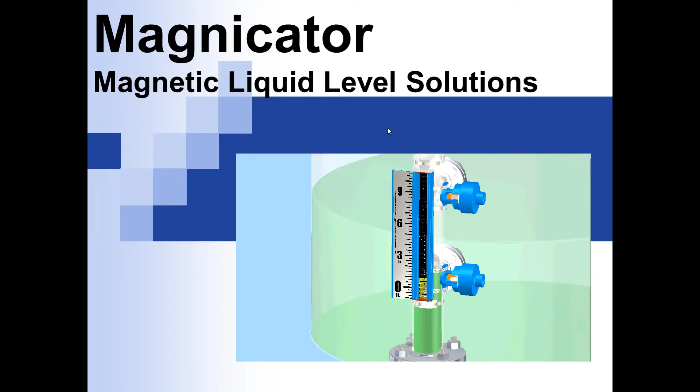As it moves up and down, the magnets in that float are coupled to the magnets in the flags. You'll see those flags turn over, black to yellow, showing your level going up, and yellow to black showing your level going back down. There's also, coupled on the side, some snap action switches that are activated by the magnets. You can also have a transmitter on there. So again, this is just a 3D representation. We're going to discuss all those different points in detail throughout the course of the presentation.

So you'd have to manually reset this—take a flag, reset all these flags to where you know the level to be—or simply wait for the float to cycle down and back up. Of course, if you have switches on the side, this is problematic with the weak magnetic coupling, as well as if you have transmitters on the side, since they rely on that magnetic field from the float. And this, like I said, is the number one problem that I see when I travel out into the field.

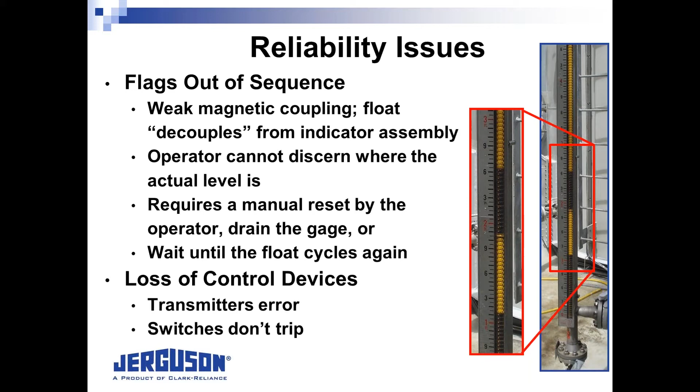So the solution begins with a better magnetic field coming from the float. The Jerguson design uses a unique arrangement.

We take 2 Alnico 8 ring magnets. Alnico 8 is a permanent man-made magnet. Alnico stands for aluminum, nickel, and cobalt. The 8 rating is a combination of factors, it's not simply a strength rating, but you can kind of think of it that way. It's a permanent magnet, rated to 1,000 degrees Fahrenheit. We take 2 of these ring magnets.

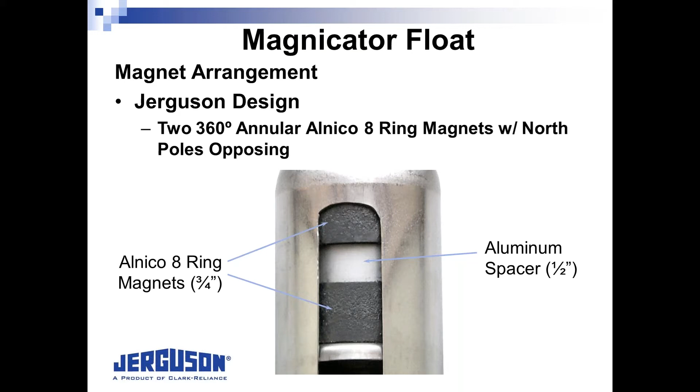When you take those 2 north fields and you push them together—hopefully everybody here has kind of played with magnets at some point in their life—you get that repulsion, that repelling you feel from the magnetic fields, and that repulsion is magnetic flux. The principle of magnetism is just like electricity goes from positive to negative; magnetic field flux goes from north to south. So when I take those 2 north poles and push them together, another principle is those flux lines can't cross. So when I push them together, that repulsion you feel is those flux lines pushing back, because I'm trying to force them together and they're saying, no, I can't.

And what that creates is, we're taking that field and pushing it out far away from the center line of the float. Again, it's a hollow magnet, so here's your center line and here's where the bodies are. So when I'm forcing that magnetic field out far away from the center of that float, I create a very strong north magnetic field out here, out where the flags are. And that's where you want to have your magnetic field, not only strength, but focus.

Circling back, I mentioned Alnico 8. There are other grades of Alnico, but the number that is most important here—there's a couple things. One is your max temperature. Again, our entire gauge is rated to 1,000 degrees Fahrenheit as a standard. So you want to know that your float magnets can withstand your process temperature.

Alnico 8, the reason we use it, is it has a very high magnetic coercivity number. Other manufacturers use Alnico 5. The problem with the lower grade magnet is, under the presence of both temperature and magnetic field, that Alnico 5 magnet can lose its magnetic field. So there's actually some brands out there where a customer will say, well, my float decoupled, there's something wrong with my float. And they'll say, well, you just send it back in, we'll recharge it. And they put it into a machine and it puts a new magnetic field back into those magnets and sends it back. So on our design, because of that high magnetic coercivity, you don't have to worry about that.

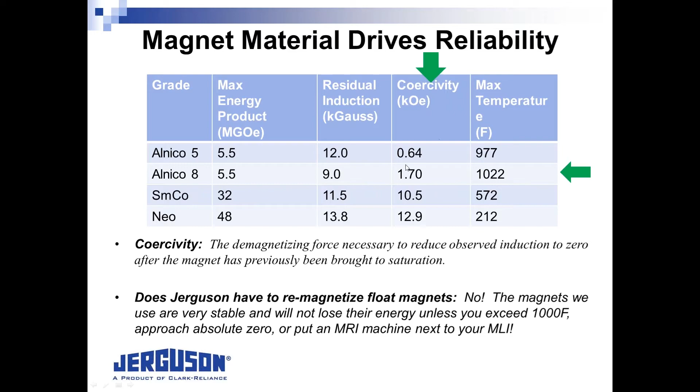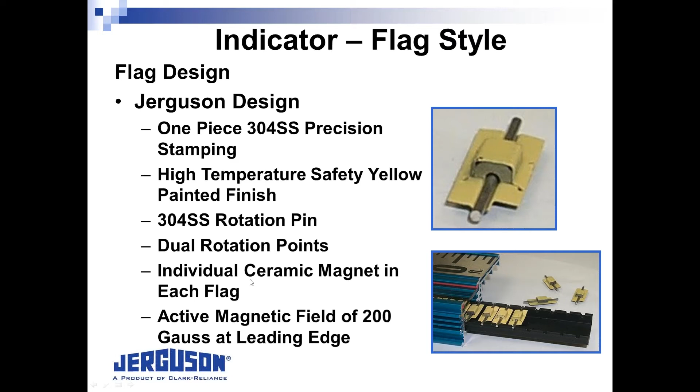I mentioned that magnetic field strength is important, but the principle about magnetic fields is it's not just the strength, it's also the direction. You want to have as much as possible a tangential magnetic field here, where your field is, because that's what's going to pull that. You want to be pulling those flags this way, you want to turn them.

So you need to have, when we talked about at the very beginning, the different pieces of a magnetic indicator - you have your chamber, your indicator, your float. We've talked about the design of the magnetic coupling between the indicator and the float, but just as important is having a reliable chamber design.

Our standard chamber is 2.5 inch Schedule 40 pipe, shown here. We do not use Schedule 10. There are some manufacturers who offer Schedule 10 as standard, and I've been into many refineries that don't allow Schedule 10 in the plant, but during the quoting process they didn't pay attention and may not have specified Schedule 40.

A vendor sends in a quote using their standard Schedule 10, the purchaser misses it, and they buy it and install it. Only after they've written the check and gotten the product do they find out it's Schedule 10, and now they have to go in and fix that problem. So something to pay attention to - it does happen. Even if your standards call for it, you have to make sure it's complied with when you place that purchase order.

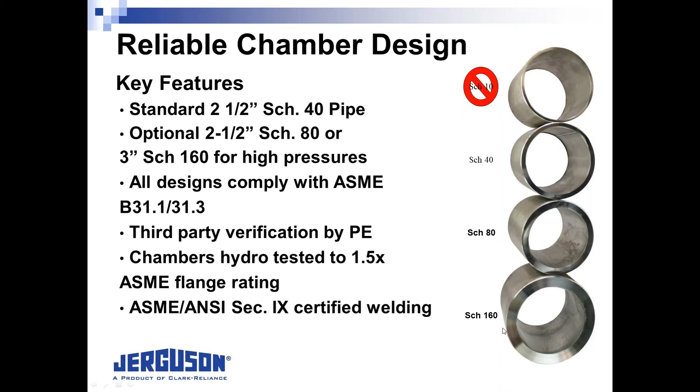So speaking about nozzle designs, these all comply with ASME design, and all the engineering has been third-party verified. For 150 pound and 300 pound class gauges, our standard nozzle connection would be a slip-on type flange over a pipe nipple. The pipe nipple is saddle weld prepped, and it's a full penetration weld to the chamber. It is a full penetration weld, but it's not an X-rayable weld. That's sometimes a point of confusion. This meets ASME for 150 and 300 class magnetic level gauges.

When you get above 300 pound class, 600 and above, ASME requires a self-reinforced fitting, so we have to go to an O-let or a weld O-let. That weld O-let is a full penetration weld to the chamber. In this case, this is now a socket weld type. You'll notice this opening is a little different because you're not doing the slip-on style. You have a socket weld to the nipple, to the O-let, to the chamber, and that's your branch connection.

Now, in both of these scenarios, you're limited on the size of the branch connection you can safely put onto the pipe. So our standard for a 2.5 inch, unless you specify otherwise, even for 150 and 300, is going to be a 1 inch nipple. And that's true for the O-let as well, so we use a 1 inch nipple. This is a reduced size, so even if you have a 2 inch flange here, it's still going to be reduced down to 1 inch.

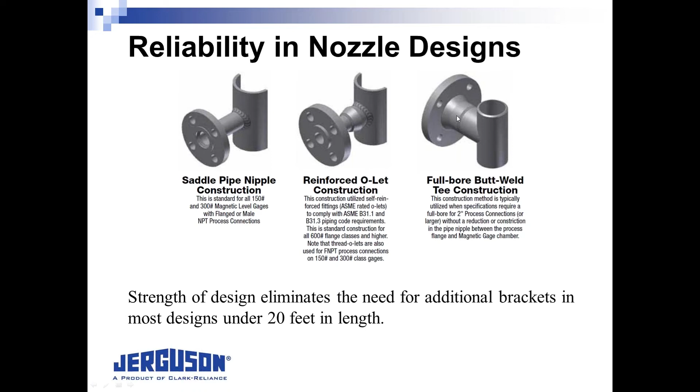So that closes off the chamber section. We talked about indicators, but one of the biggest benefits of going to a magnetic level indicator over a glass gauge is, on top of what Mike touched on at the beginning, the old style tubular gauges got pretty dirty. They came up with brushes, so you go in and brush them out. Obviously operators don't love doing that, it takes time, you have to shut it down, isolate it, brush it out. Magnetic level gauges, of course, you don't have to worry about that contamination. It doesn't mean they're maintenance free, especially in dirty service. You still may have to flush a magnetic level gauge from time to time if you have buildup, but you typically get a longer time between maintenance where you'd have to flush it out.

But again, one of the other benefits is because you have that magnetic float inside, I can now put devices on the outside that use that magnetic float for function. Whereas a glass gauge, obviously, it's a window into the process, but I can't put a switch or a transmitter or anything that works off of that window. So the SAS16 is a snap action switch, it simply clamps onto the side of the gauge.

It's rated to 750 process temperature. There's no cams, springs, no movable parts. You can actually see it best in that first slide, but there's a primary magnet right at the chamber, and as that float moves by, the outward tip of that magnet is attracted to the float magnet. So as the float moves up, it moves up, and as it moves down, it moves down. Inside, on the opposite side of the back of that primary magnet, there's another magnet that is repulsed by that same side. So I have a north field for my float, the south field's here, I have another north on the inside, and then I have a magnet with a north. As this inside one moves up and down on the pivot, the switch is made by that action of that repulsion force.

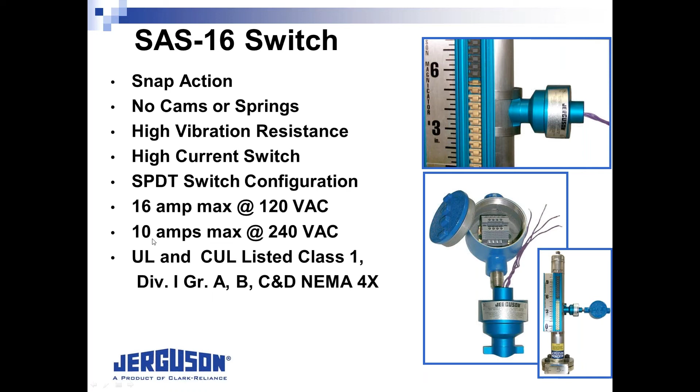UL for North America, but we also have an ATEX unit if you were selling units that were going to Europe.

So coming out this year, we've had on the market the MT2 4200 for a number of years. We're still officially selling the 4200, but we also have available the MT2 4300, our next generation of transmitter. We're still going through some of the final steps in the production process, but we've been putting it into the market for the past probably about 4 months.

One of the big step ups is, this is a 4-20 milliamp device, continuous output. The old 4200 was HART 5, the new one is HART 7, so it brings it up to current standards. On top of just updating the display, it's got a nice bigger display. It has a user interface without opening the cover. The old one had a 3-button interface.

Some of the big changes are the signal-to-noise ratio, substantially higher than the 4200, up to 5 times as high. So you don't have to worry about noise being as much of a problem and causing false trips.

There's an adjustable rate of change filter, so you can tell the transmitter, if it's mapping along really nice at 24 inches and all of a sudden the transmitter thinks it's at 60 inches because of noise, the transmitter is smart enough to say, well, it's not possible, I can't go from 24 to 60. Depending on the setting, it'll ignore that 60-inch reading until it settles back at 24 inches when the noise settles down.

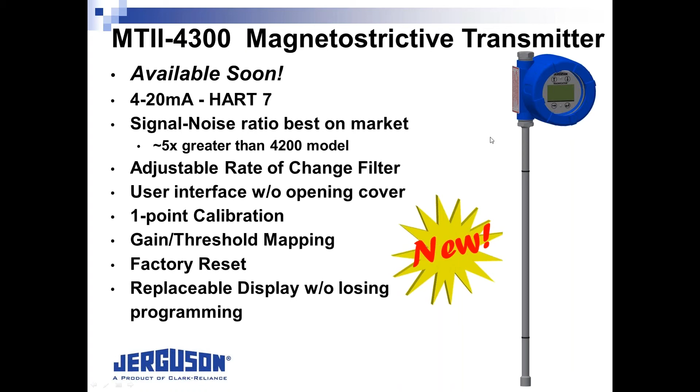You can replace the display without losing programming. So if the display, over time, grays out or becomes damaged for whatever reason, you can replace that and your programming stays integral to the boards. So we're pretty excited about that.

So that's the product part of the presentation. I do want to talk about some applications, some challenging applications.

One is flashing or boiling service. There's a video we'll show you here in a minute, but with the emergence of fracking and all the gas work that's been done over the past decade, we've seen a much greater demand for level gauges that can handle cryogenic applications. One of the biggest markets out there is gas fractionation. Especially right here in Ohio, they're bringing the gas out of the ground and splitting it into different consumables: ethane, propane, methane, etc. Part of that fractionation process involves cold boxes that make those level gauges really cold.

If I have a fluid, we'll use propane as an example, that I have to keep at, let's say, minus 40 F, in my big vessel it's contained at -40 F, well insulated and chilled. I have some piping coming off the side going to this level gauge. I have a much smaller volume of fluid, and even though it's insulated, I have a much higher surface area, so I'll have greater heat loss into that chamber. What will happen is you'll slowly raise the temperature of this fluid to the point where you start to get some boiling or flashing.

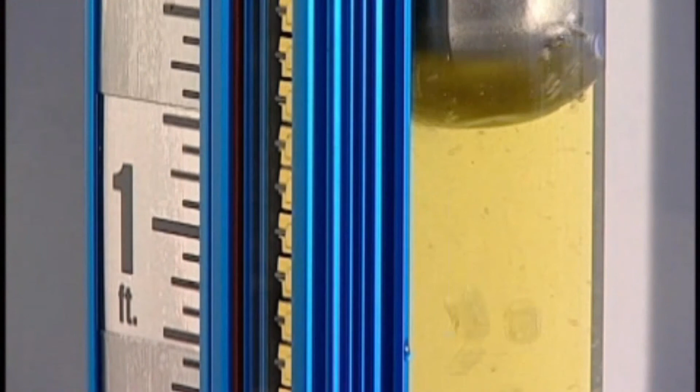If the liquid in your magnetic level gauge boils or flashes, you can forget about getting reliable level measurements for indicators, transmitters, or switches. How can this happen? It's a hot summer day. The liquid in your storage vessel is being maintained at a controlled cold temperature. However, the small amount of liquid within your magnetic liquid level gauge has warmed up to near or above its critical boiling point. Entrained gases from the boiling rise and collect under the float, reducing its buoyancy. This boiling fluid can sink not only your float, but any hope of getting an accurate level reading.

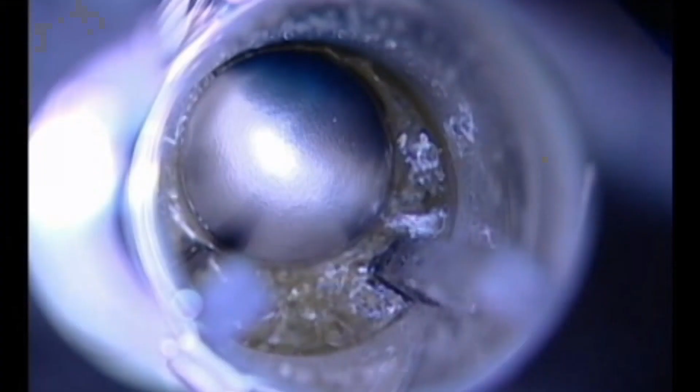The new Jerguson Magnicator Flash-Proof Gauge features a unique chamber design to eliminate problems from boiling liquids and flashing vapors. By employing an oversized 3-inch Schedule 40 chamber with internal guide rods, entrained gases easily escape past the float.

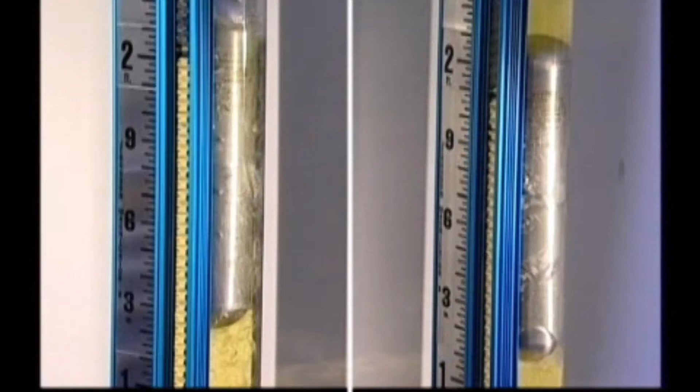An accurate float level and indicator reading is maintained, as the guide rods hold the float to one side of the chamber to ensure an optimized magnetic field in close proximity to the indicator, transmitter, or switches.

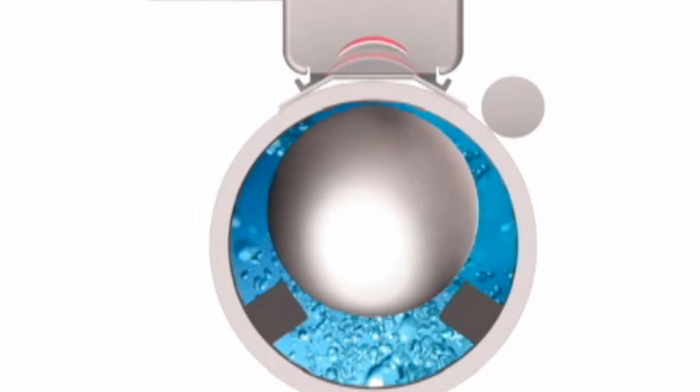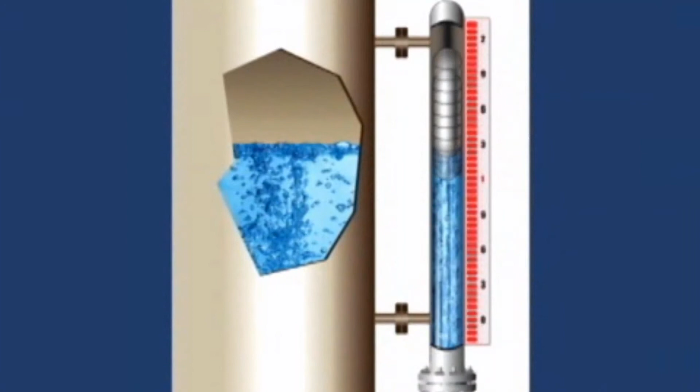The Jerguson flash-proof design also eliminates crushed floats due to flashing vapors, which can happen when the float rapidly accelerates into the top of the chamber due to depressurization.

Because your plant's operation requires reliable level measurement for indicators, transmitters, or switches, we'll scroll through some applications of fluids. Generally the rule of thumb is you can use 0 Celsius, 32 Fahrenheit, whatever number you want.

That should be the point where alarm bells start going off. That is to say, if you have a process that operates right around that 32 Fahrenheit -- obviously if it's winter, we're based out of Cleveland here, it was about 20 degrees driving in this morning, you're not going to have any heat loss, so you don't really have to worry about flashing in the middle of winter. But in July, when it's hovering in the mid-90s and you get some direct sunlight on that gauge...

...process that's operating around 32 degrees Fahrenheit -- if it's got to maintain 32 to stay in a fluid state, you're certainly going to get some heat loss there into the chamber, and you'll definitely get some flashing, and that's where the issues come up. It was as simple as an application I had in Pennsylvania where they had a large bullet tank like this. It was a cryogenic tank.

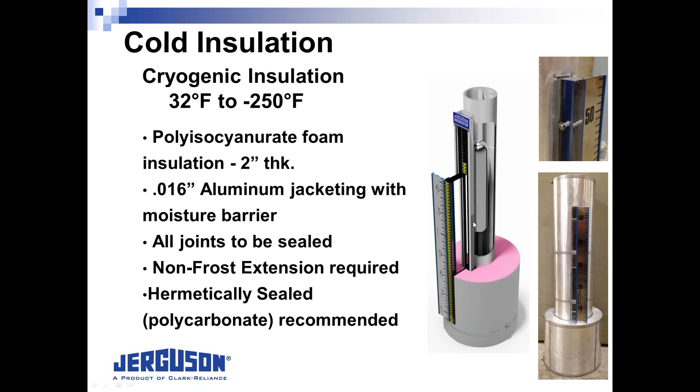If they're buying this to install it, I typically recommend letting us do the cold insulation. From a cost standpoint, it's going to be very similar, maybe even less than what they'd pay to do it in the field. And ours is done better -- we do a better job sealing it up than a lot of what I've seen in the field. We run into issues where they don't do a great job sealing it, moisture gets in, they start to get ice buildup, and that ice buildup causes issues -- if you had a transmitter under there, it puts pressure on that transmitter or what have you. So something to keep in mind.

So that's how we came up with that design, the oversized 3-inch Schedule 40 chamber with the guide rods. I'll talk about the construction now. It's 3-inch Schedule 40, and we use guide rods at specific locations, a square guide rod.

This creates a similar sized opening to what the 2.5-inch Schedule 40 was for the float, but then creates a massive bypass zone for flashing vapors to move around the float, like you saw in that video. This square guide rod is welded at the ends of the chamber, and it's back welded to the chamber, so we drill out the chamber and back weld it every 3 feet or less, so you never have to worry about those guide rods coming loose, bending, or flexing, causing the float to not be able to move by. So we came up with this design for flashing applications, for cryogenic applications.

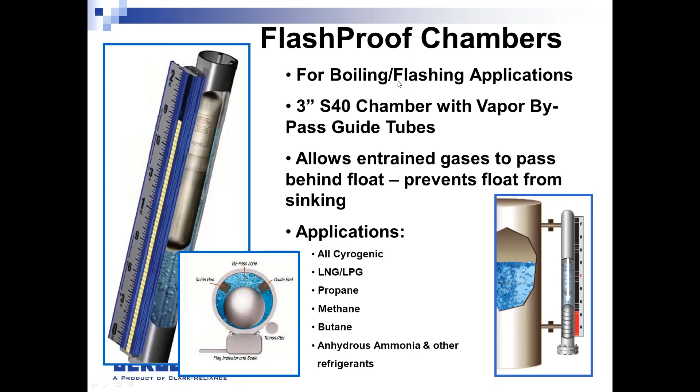But something we discovered along the way was it also worked really well in dirty service. The reason being is, I have this oversized chamber to allow flashing vapors to move by. Well, what about if I have particles?

So if I have a dirty service, the one I always like to use is the reduced crude drum. You get down to the bottom of that drum, you have some heavy crude. You have paraffin starting to build up. You may have some sediment, you may have some silica, but you have lots of substantial sized particles now present in the bottom of that heavy crude.

So this oversized chamber does a couple things. One, it maximizes the space between that float and the chamber. A standard chamber has about 1/8 inch clearance around, so if you start to get a buildup of heavy solids, it's not too long before it starts binding up on the walls of that chamber. This greatly increases that amount of space.

But one of the other big benefits, especially if you have very dirty service like I said earlier, is this is a lower maintenance product than a glass gauge, but it's not a zero maintenance product.

Another benefit of this bypass zone is I can now do flushing without removing the float. So your drain is still centered on the chamber, but your float is offset. You have these guide rods keeping it in. You can add a steam port to the side of the chamber, and I'll show you in a couple slides what that looks like, where you can now run steam through this gauge.

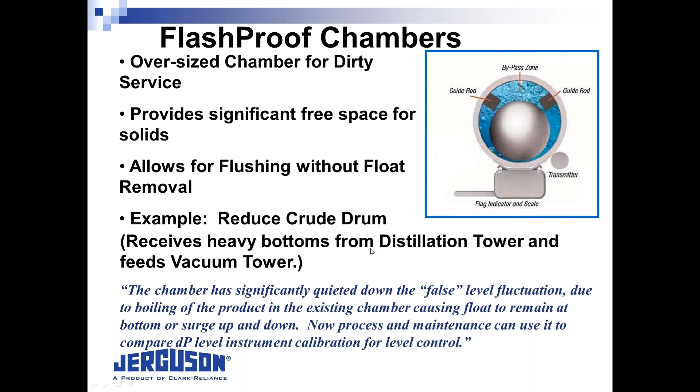So this is something we've used a lot more. Again, the two big applications are the bottom of those distillation towers, where for years they've had glass gauges that become coated within minutes of putting them into service and are impossible or near impossible to read. So that's been a really nice application that we've been offering.

The last big point I want to talk about is combined technology. Most of you have been talking about magnetic level gauges, but we'll discuss guided wave radar here for a little bit. So we have a product we call MGWR, which stands for Magnetic and Guided Wave Radar.

So here on the left is a standard magnetic level gauge, 2.5-inch Schedule 40. This happens to be a Night Star, which is our illuminated level indicator. But you also have a secondary chamber, now tied to your main chamber, so you only have one common drain, and it's a 3-inch Schedule 40 chamber.

In this case, it's showing an Endress+Hauser guided wave radar on top. The benefit of that is I have a single set of process connections, so I don't need an extra set. But now if I have variations in specific gravity, or if I just want a redundant output, I can do that all off a single set of connections.

So your fluid still enters from your bottom tap, fills up the bottom, and as it fills up the magnetic level gauge, it also fills up this bypass chamber. Inside you'd have, depending on your process, a rigid probe. We have some applications where we do this with a rope probe for longer applications, or for applications where they have limited head space and want to be able to take this flange off and just pull it to the side.

So we have done bottom flange units with rope applications. You'll see that on the next slide. But now changes in density don't affect your output.

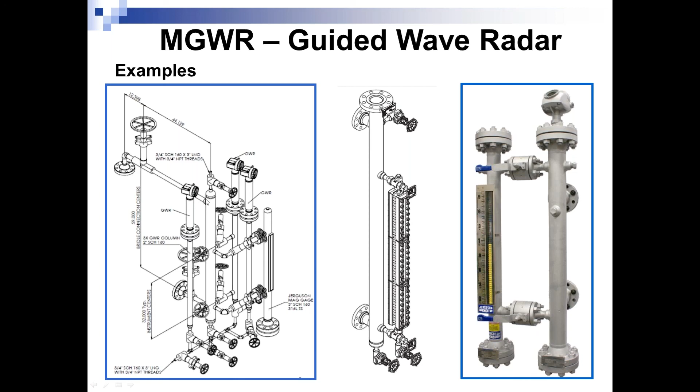So there are other options out there besides our standard offerings. We can do different applications, different products to fit the application versus the other way around.

So that is it for my presentation. I tried to touch on some of the key focuses about reliability, a couple applications there. Obviously, I didn't want to take the full hour in case there were any questions either about the presentation or otherwise. So with that, Paul, I've got the question box open, so if anybody has a question while we're wrapping it up here, please enter it in and we'll make sure we get it taken care of.